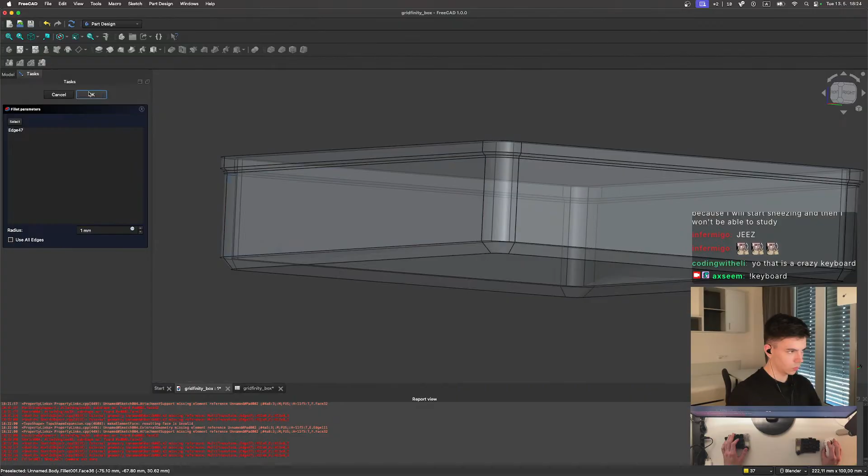Hey, hello Sakura. How's it going? Yeah, I'm good. Pretty good. Designing a box for my stuff. You too, it's nice. What do you think? Does it look good?

I'm making it full parametric, so you can just basically change everything you want. Like for instance, rib offset 4.8. Now all the ribs are huge. It's for organizing, like I'm making something like that, if not to say fully like that.

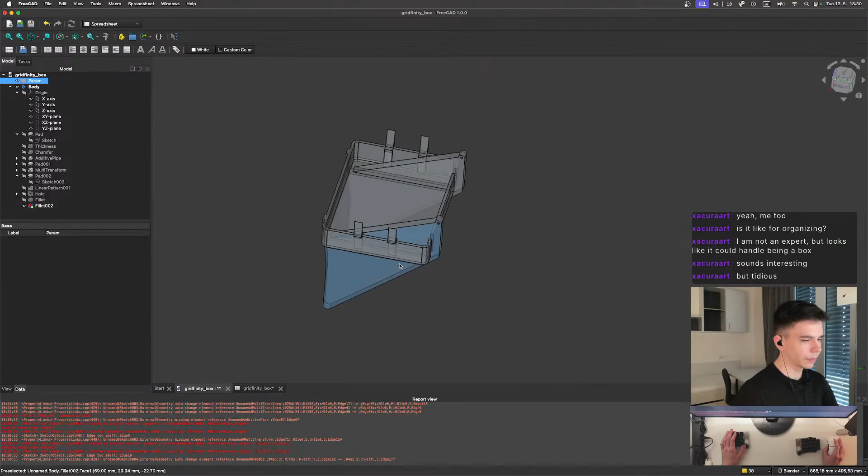Sounds interesting but tedious. Yes, this will be tedious. I don't know, I love FreeCAD, but sometimes it just doesn't make sense at all. You see, okay, quick explanation. The system has height units, where each unit is 7 millimeters, right? So you stack those plates in units. I did it the same way, so I have height unit equals 4, which is weird. Why is it 4? It should be 7, right? So height unit is 7, and when I change levels, for instance, to 4, nice.

But okay, I broke everything. Insane. That's insane. Why is it? This shows how you don't understand FreeCAD. Yep. I mean, it's not like I don't understand, it's like I have no other choice. It's like this cage. How can I say it?

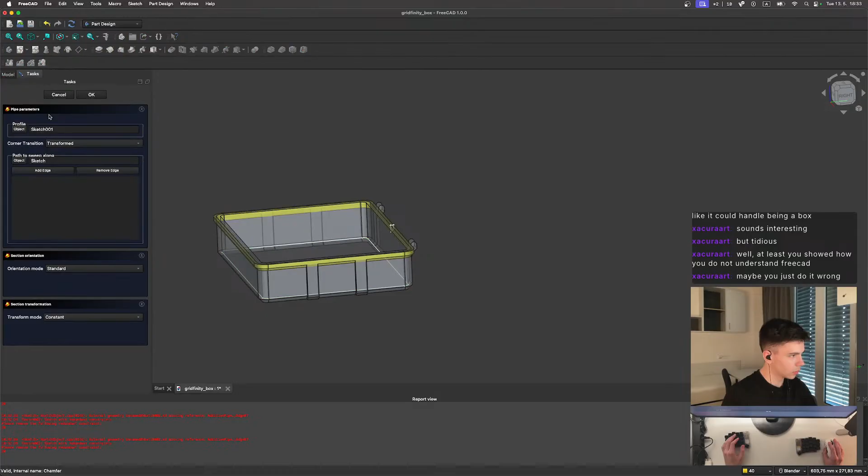What the hell is that? It just modified my sketches. Can I, will it save it? Don't save. File, open. I need a backup. Yep, here we go. Nice, nice, nice. So, not this one. What am I doing? Maybe I just do it wrong. Perhaps there is a correct way. It could be the problem, right? That I'm doing it wrong. But if there is no intuitive way to do it right, it's probably not my fault, right? That's what I'm leading to.

You see, I have this line, right? And it's constrained, so it means it has no other way it can be. So it's the only single way it can be in this sketch. I can move it. If I delete this constraint, I can change it, I can change its length. But now when it's constrained, I can't. However, if I change parameters, what can happen if I make it... if I change height too much, then it will just invert. So it basically will have the same length, but another way. And that's why it breaks, and there's nothing I can do about it. Really, what can I do?

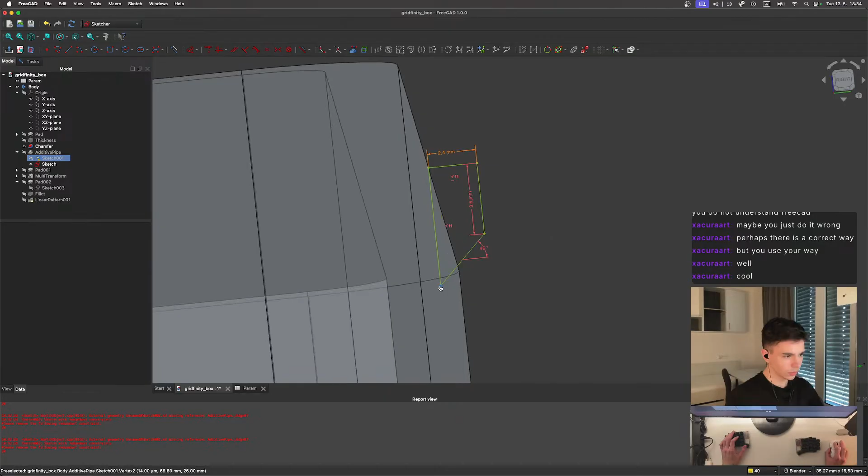I know, it's so weird. Okay.

Ask Google. I tried, bro. I tried and I got nothing.

Okay, let's try. First of all, height unit is 7, right? Okay, it works, it works. And now I'm going like 4. Okay, so here we go again, right? The moment it breaks...

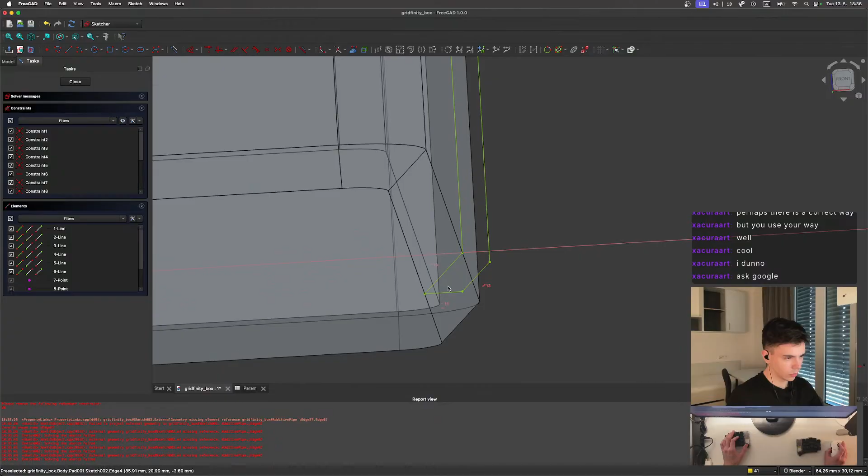Maybe that will fix it. But I'm not sure.

Okay, so now it works. Okay, now it breaks. However, if I'm doing it step by step, like 7, it still works. 6, 5, 4. You see, like, now it works for some reason.

It's so weird. Why when I say that straight to 4, it doesn't work? But if I gradually do it one by one, decreasing by 1 level each time, it works. Yeah, it's so weird. Why would it be that way? That's the problem I'm talking about.

I broke it? Why does it... Yeah, that's insane.

6? No, it breaks, I have to do it that way. Four, let's go, stop breaking stuff. I'm trying, I'm honestly trying. I wish I could, I was so good at this.

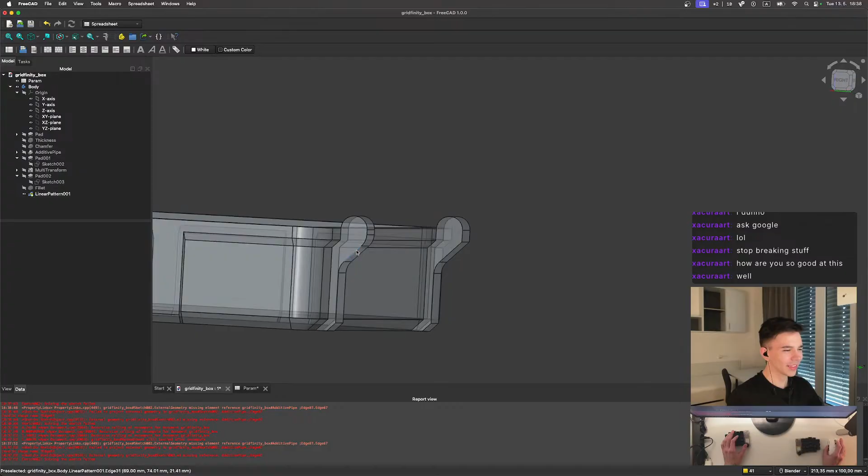8, let's go. Okay. Well... Well, what? What are you trying to say?

Okay, let's be clear. Are there any evidence that it's me who does things wrong? Because I show you a clear example where it works absolutely not how it should.

Okay. Nice, looks good to me. But we all know, yeah. Maybe it breaks because you made it wrong.

But okay, like, I'm doing the same scene in two different ways, right? I see no other explanation why it could be that way other than this software is broken. It should not be... I just have no words.

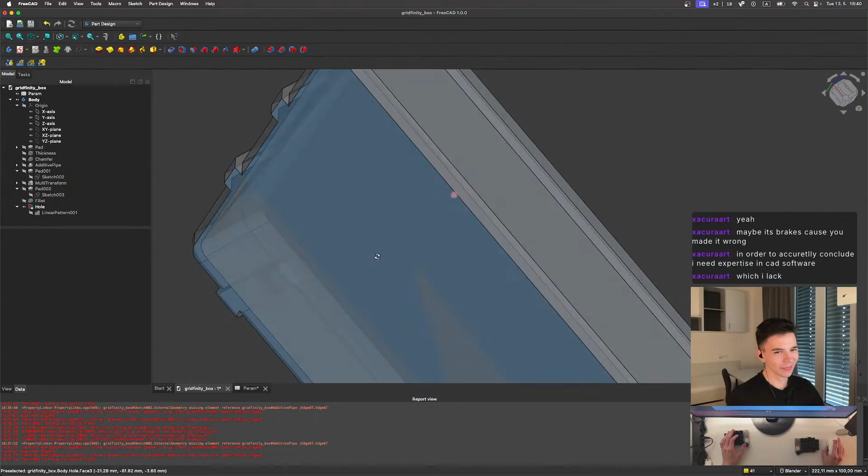In order to accurately conclude, I need expertise in CAD software, which I lack. Okay, what should I do? Also I need to...

You are studying mechanical engineering, right, Sakura? I need your help. I need... How can I call them?

I have to model those connectors and I just have no idea how do they work. As far as I understand...

But we don't have 3D modeling yet. Seriously? I thought it's like something you do the whole time. I thought it's the main thing about...

Okay, I see. So as far as I understand, it's just like...

Here is the pin, right? The screw. And because they're round, it just extends plastic here, right? So it just stretches it. And after that, this plastic just got inside the screw, got around it. And that tension just fixated, right?

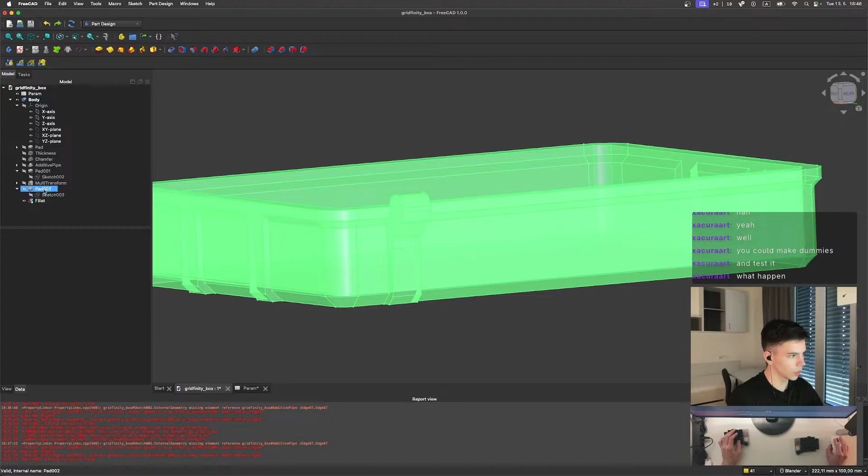What happened? Okay, so I feel like I seriously lack the technical vocabulary to explain what I'm trying to do.

But I want, like, those two ribs. What's the plan? There is gonna be a lid on top of it. And it will have two ribs outside of this one, right? And so it will be connected with a screw. It's gonna make a tension. And that way it's gonna keep them all together.

Stream died? I can tell, seems like bitrate is okay. Didn't you see that? Oh no, I got nothing. Yeah, I mean, I see stream elements shows that I rejoined the stream.

Okay, it's okay now. Yeah, okay. I guess it's internet provider probably. So, what was I talking about?

Okay, we have a lid, and this lid will have, per one rib here, there are gonna be two ribs on top, so it's gonna squish from both sides. But I want to swap them around, so there are gonna be two ribs on bottom. That way I can just mirror it here, because here it's gonna be two ribs per rib. Two. How can I say it? Two ribs per hinge, anyway, right?

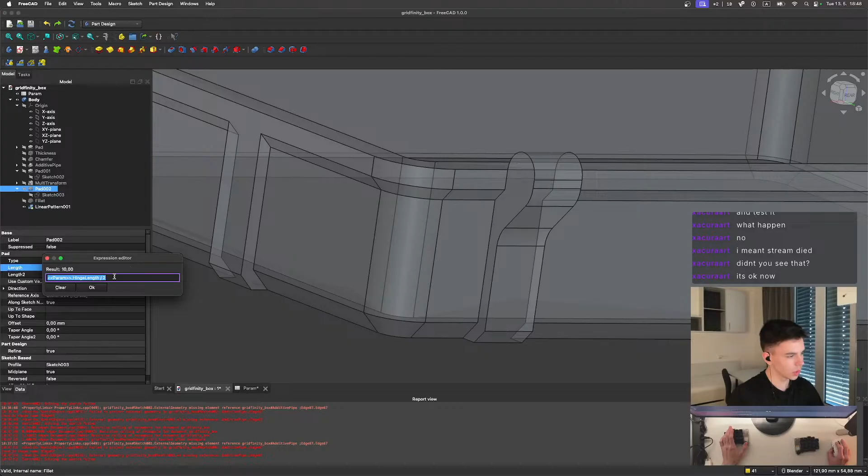Then I'm doing this one, but I'm doing offset, and I'm setting it to param hinge length divided by 2. Nice. No, it's not nice, what the hell? Oh I see, I guess it counts from this side, not from this one, right? So if I'm making it like 5, yeah.

From hinge length divided by 4 multiplied by 3. Here we go. I can tell why it didn't copy the fillet, by the way. Okay, let's redo it.

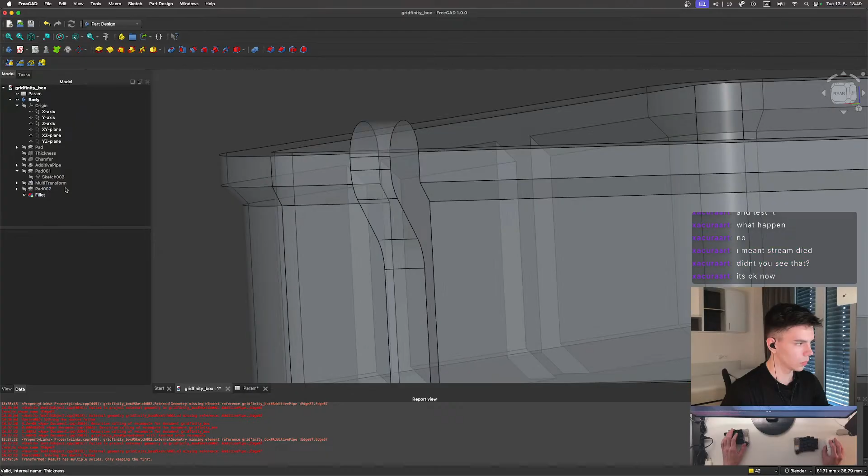Why don't I use the fillet on the copy? Fillet, nice. Yeah, here we go. Reversed.

2, and once again param hinge length divided by 4 multiplied by 3. Yep, here we go, and we are doing this once again. I broke it, I broke everything. Allow compound, just for now.

Sketch failed. Ain't no way. I broke everything once again. Okay, it works, for some reason. Reverse direction, 20. It's so weird.

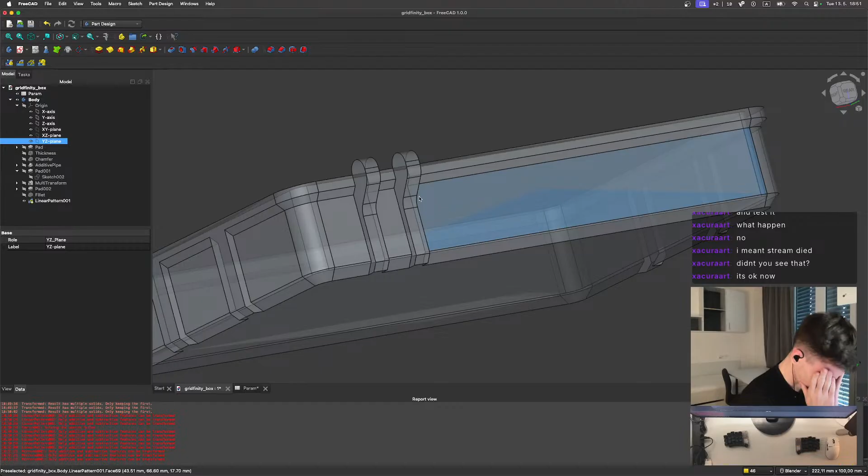I got an idea. Yeah, well, it's gonna work, right? It probably should work.

I'm making it full length. After that, I'm making a binder. Then I'm shifting that binder by not this axis, not this. Nice. I'm shifting it by hinge length divided by 4, minus.

Nice. And now I'm doing pocket. And pocket is once again hinge length divided by 2. Okay, here we go. And now I should be able to just multiply it. Nice. Nice.

But I need it to be param columns multiplied by cell width, right, minus hinge length multiplied by 2. It seems nice.

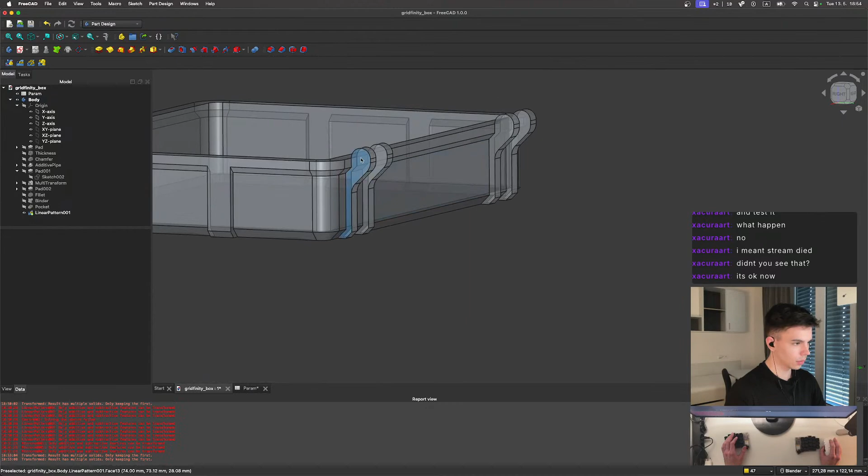Nice, making hole through all. Metric regular M3. This one. Oh no, that's not what I want.

Making dimension, I'm making it only param hinge length. Yeah, nice. Edge is close, flat. Seems good to me. The same thing here.

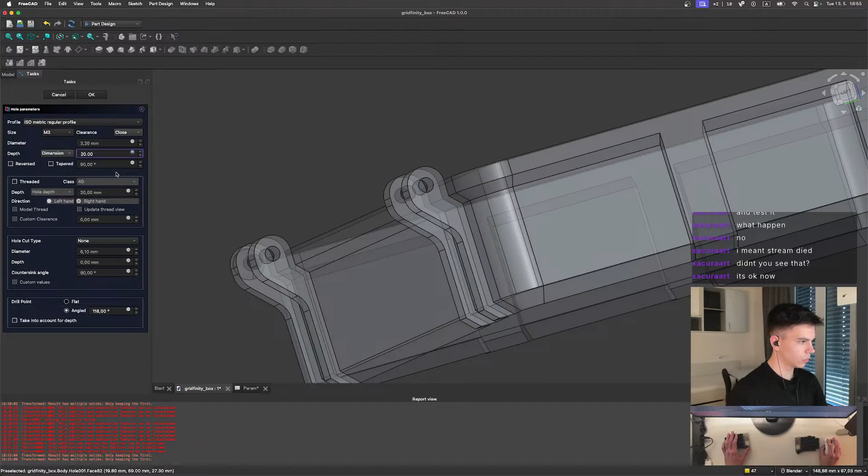Nice. And after that, I need to create holes for hex nuts. However, I have no idea what dimensions I should use. M3 hex nut dimensions.

6, right? Okay, here it's not 6. What the hell? 5.5. Interesting. 5.5, okay. Seems to be true.

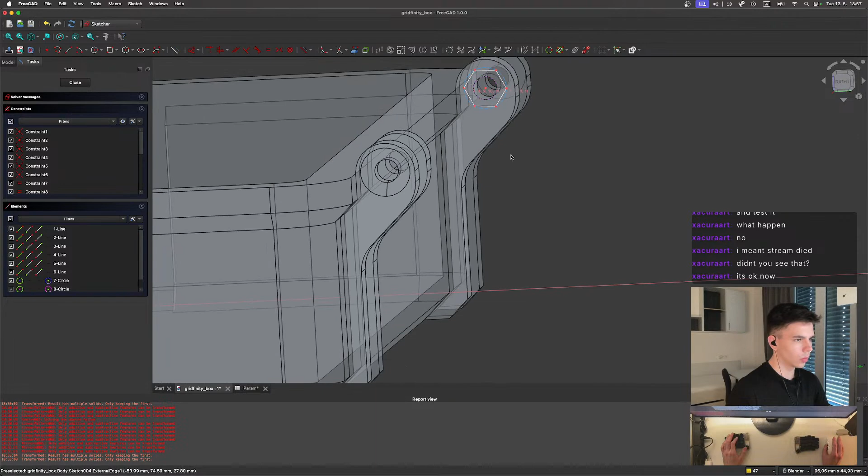So what am I doing? The... 5.6, and horizontal. Probably I should make it 5.7.

Why do you need nuts? Okay, so, like, the other choice is to make hole a bit narrow, right?

So I'll cut threads during screwing the screw, right? But that way it's not gonna be repairable. Like, after some time it's gonna wear off and screw just not gonna stay in place.

But using a nut I can just make a pocket, right? I don't know the depth. Okay, it was a nut, 2.4.

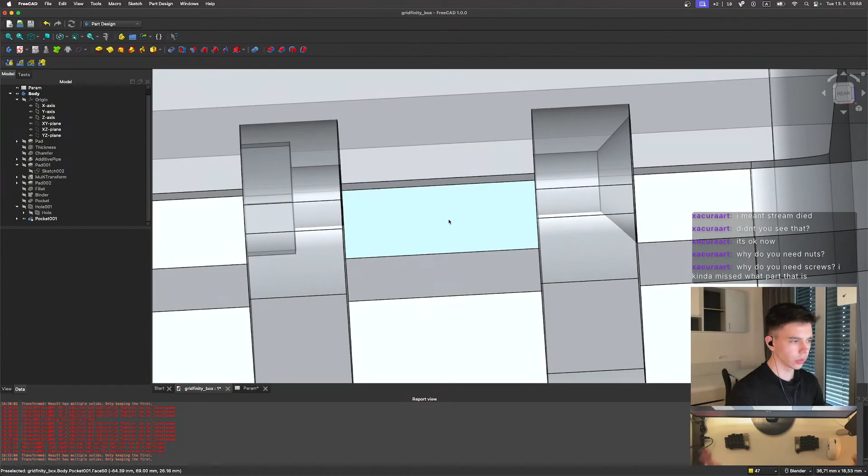So I can just make it that way. And it's gonna squish it. Why do you need screws? I kinda missed what part that is. That hinges, these are hinges.

So it's easier to just show you, like this part, no? So I just push the screw through it, screw it in, and after that it's gonna fold fully.

Why can't you make it full plastic? I tried, like I thought about it. There is just no reliable way to do it. Like it will sit on a shelf, right? Yeah, like not always. But usually, yeah.

I mean, hardware is just much more reliable. What are my other choices? Printed screws are just not gonna work because they're too fine to print on my printer, right? Plus plastic is just too soft for screws, these size screws. Other choice is to...

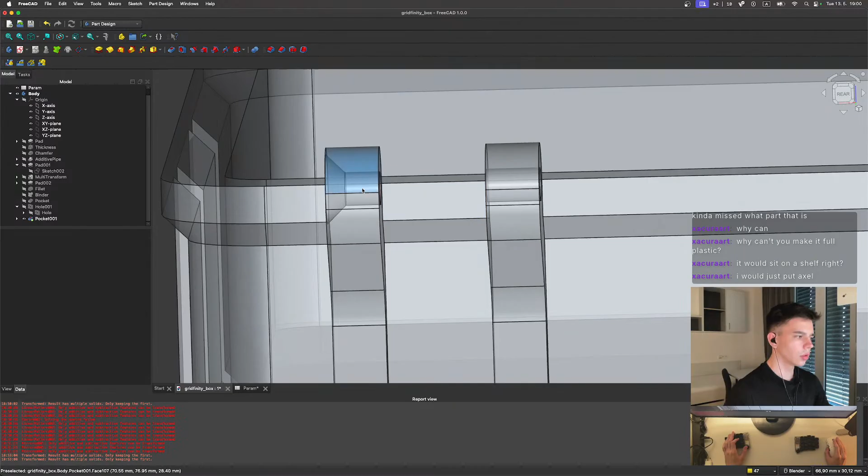Make it so I need to bend. How can I explain it? Like, I'll need to bend those parts apart, press hinge in, and then it's gonna squish it. But it's just... also if I, with enough force, it can just leave this position, you know, it can just fall off.

I would just put an axle. I have no idea what is it. Axle. Oh okay, I see.

Cut. Am I missing something? Axle. Yeah, but okay, but how is it related? How is it related to the box? I can see it.

Like, you want me to make it continuous, full length? I mean, just a stick. Yeah, but how is it gonna stay in place? You know, I need a way. Like, a screw is basically just a stick in this way, in this design, right?

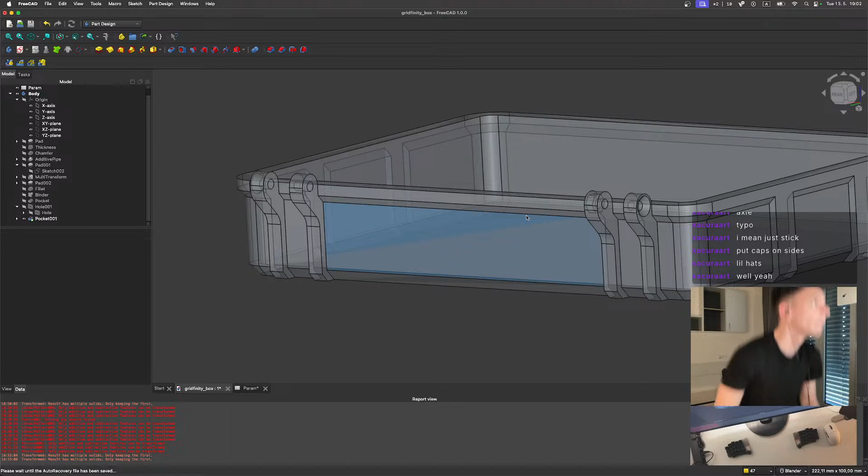I hope I'll find it. Yeah, here we go.

What do you mean by put it aside? Like, if I print sticks with heads on both sides, how am I gonna put it on this axis? It should be inside, enclosed by these hinges. Put it, and then add heads on the side. If you print heads on the stick, it's not gonna work, but if you put heads after that, yeah, it works.

So okay, you can see it's gonna be easy if I make it this way. Oh, I broke it.

Right? So it's like a spinner. And as you can see, I already lost one side because everything is fixated by friction. And that's the main problem, it's so easy to break it.

It's really unreliable, and it's hard to make it reliable, because the tolerance here is absolutely fine, it's not a problem of tolerance. I'll just try not to break it — oh, it's already broken. It's not broken, I just basically disassembled it.

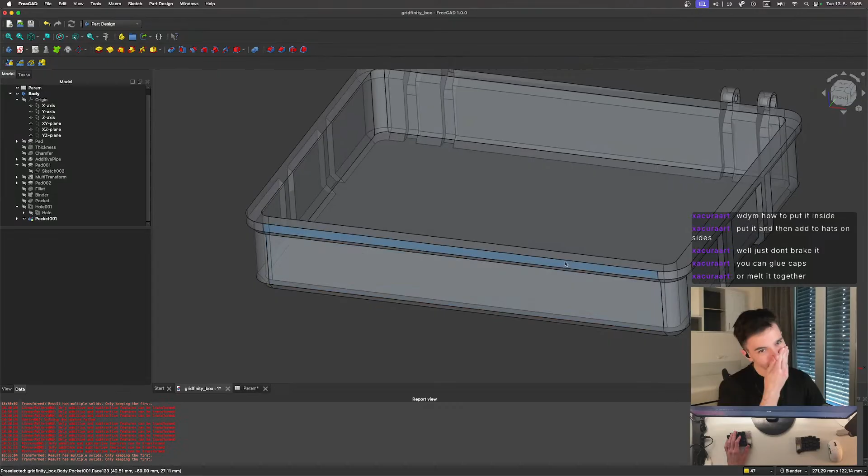You can glue caps. Oh yeah, that's something I really want to do, but I also don't have glue, or melt it together. I want to make 4 or 5 of those boxes, and that's not what I want to do. I mean, I'm okay with doing it 4 or 5 times,

but with all my experience in keyboards, I just came to the conclusion that it's much better to make it with the least steps possible. Buy it? I can't, there is no such boxes, no modular one.

Like this one. And the ones that are regular boxes, not modular, they cost the same as the plastic to print one, if not more. So I even save money on that.

Not boxes — you said you don't have glue, buy it. Ah, okay, I see. It just feels bad, like why would I glue it if I can make it that way, right?

It's gonna be much more reliable and more repairable, and it's not like screws cost a lot, you know. So if I'm already gonna buy glue, why can't I just buy screws, right? What's the problem? What's the point of not buying screws just to buy glue?

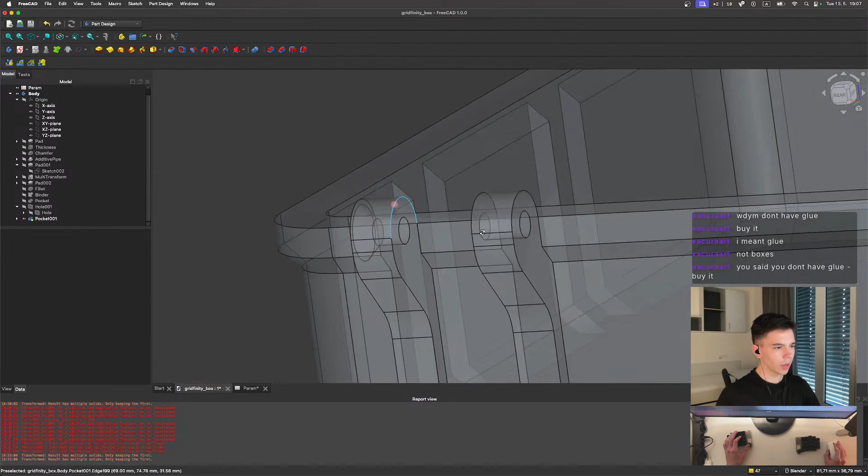If there was a solution without screws, okay, but the ones you propose are just more complicated than this one. That's the problem. The best I can think of is just to push it inside, so those holes are not gonna be through all the way, right? They're gonna be just to half.

From the left part to the half of the hinge, and the same way here, and I'm just gonna squish it inside. But it's also gonna be unreliable — if something happens to the hinge, I'll have to reprint everything.

Okay. Export. Step. Gridfinity box, both. Save.

What do you mean reprint everything? That's the point — no, if the hinge breaks, right? If it breaks, it's plastic. No, like...

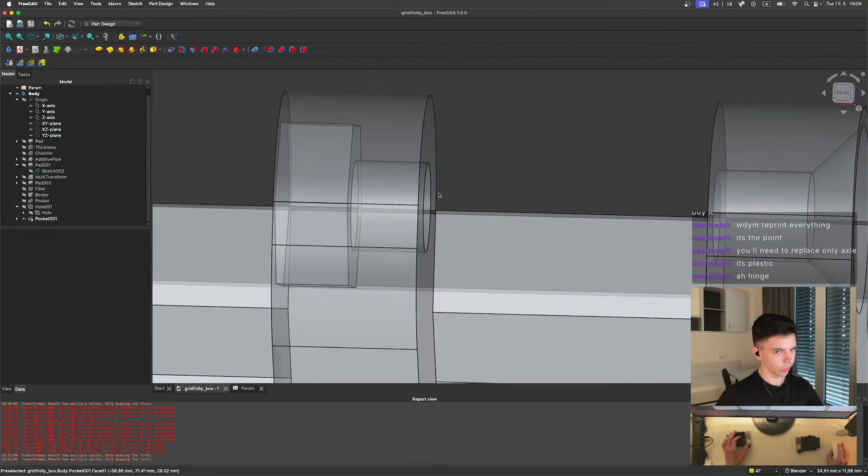If I'm using screws, there's little chance, it's unlikely you'll break the hinges. If I'm gonna squish it in, if I change the design to squish it in, the chance is gonna grow rapidly. And if I need to swap them, swap lids for instance, and I break it, there's no other option but to reprint it. I just try to balance simplicity, rigidity, and repairability. That's it. Screws seem like the most balanced solution.

Not this one. Gridfinity box, let's go.

To print this one, it takes 6 hours. Know what I'm saying? It's gonna take more. Oh, my bad, the layers are too fine. Okay, let me read.

So the first one, butt hinge - it's like the one I'm doing. The most reliable, the most simple to do, pretty much simple, and it's easily repairable. What are my other options?

Print in place. So it prints in place and plastic makes everything for screw. The problem is I can't do that because my bottom part is much higher than the lid. So I can't just print the lid here, you know what I mean? They should be printed separately, so it's no go.

Snap hinge - that's the one I was talking about. Used in injection molding, and the principles translate surprisingly well. So you basically just snap them in 2 parts and then assemble afterwards, relying on the ability of the plastic to flex and snap into place by precisely controlling offsets.

The problem is it's gonna be really difficult to do here, because my hinges are - it's better to show it here. Like, there is no space for plastic to bend. It just won't flex.

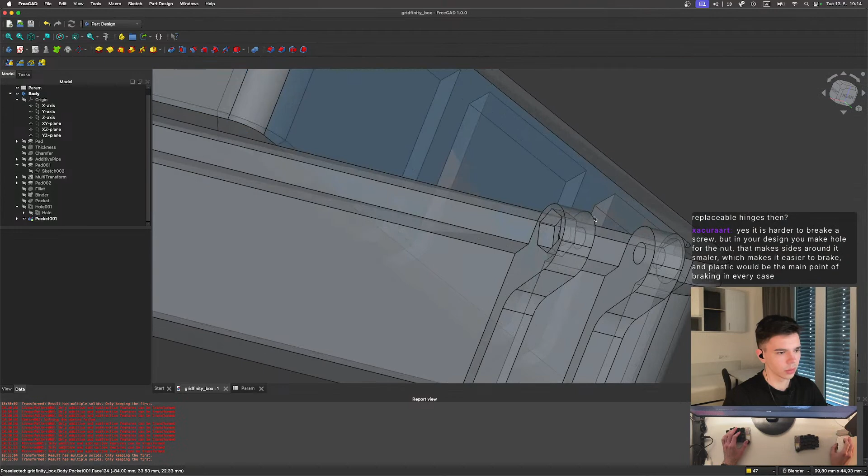Yes, it's harder to break a screw, but in your design, you make a hole for the nut that makes the sides around it smaller, which makes it easier to break, and plastic would be the main point. But there is no tension - you're right, but there are gonna be no tension on the sides. That's the point, so it's probably should not affect. I guess I can just do it this way.

There is a truth in that. I can - oops, my bad. Yeah, perhaps I can make it that way. But I don't think the main tension is gonna be on this cylinder, on these two.

I still don't see how a plastic axle would introduce tension that could break it. Like, imagine it is open, right? I can be wrong, but how do I see it?

Imagine the lid is open, right? So the lid is here, and it's connected here, and there is a long plastic pin here - the axle, right? And what if I'm gonna bend this lid in this direction? It's gonna just spin. It's not gonna break it, right?

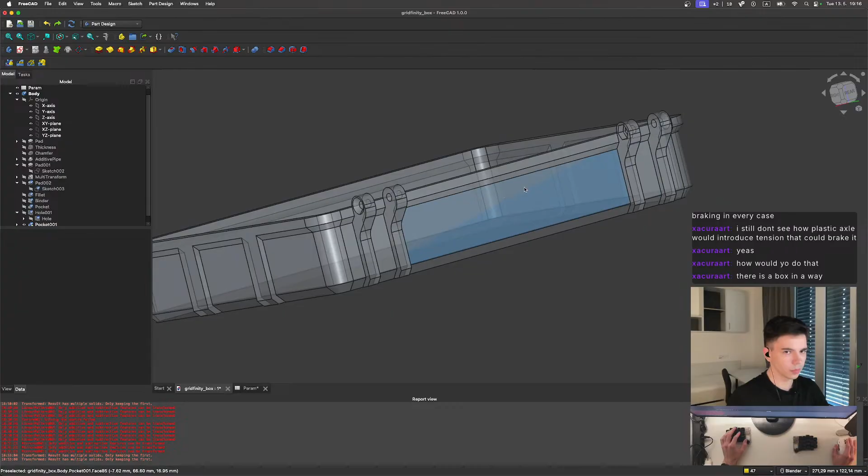Yeah, it probably should not be that bad. There's also twisting force - where? You mean... Okay, I see, you think it's not gonna be that bad, is it? Plus, it's gonna be constant static force, it's not like it's gonna change - I'll screw it once, and it's not gonna change.

You can make two small axles. Yeah, but that's not the main point. I understand that I can make two axles.

I thought about it, I had an idea of making something similar to what you propose, but like - we have an axle, right? So it's just a tube, basically, and it will have a printed head here, already printed. You want to put it on here, and here I wanted to make something like this - so I'll squish it, put it in, and it will just grab the sides.

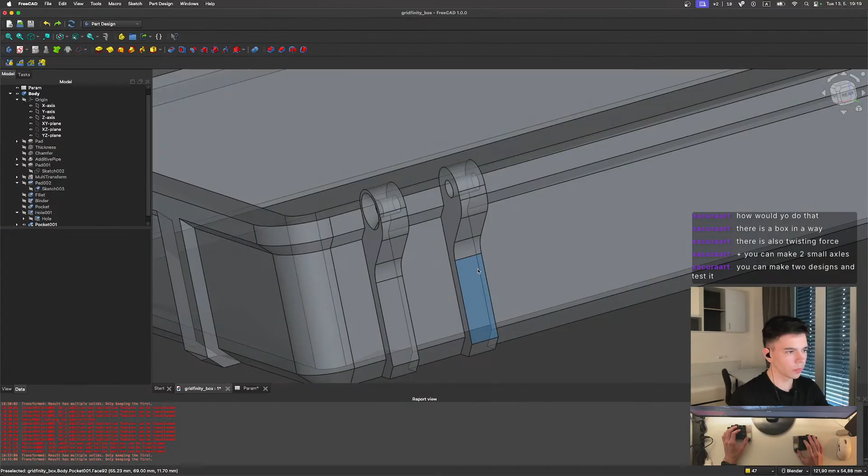What I was trying to say - oh yeah, so I'll just leave it this way, as it is. So it's designed for screws first, but there is absolutely no problem to 3D print axles and just use axles instead of screws, right? Or am I wrong? There should be absolutely no problem with that, I guess. And that way, it's gonna be like 2 in 1.

It should be. Okay, now I'm curious. It's like half a millimeter, which is bad. No, it crashed. Start recovery. Okay, I thought I was about to redo everything.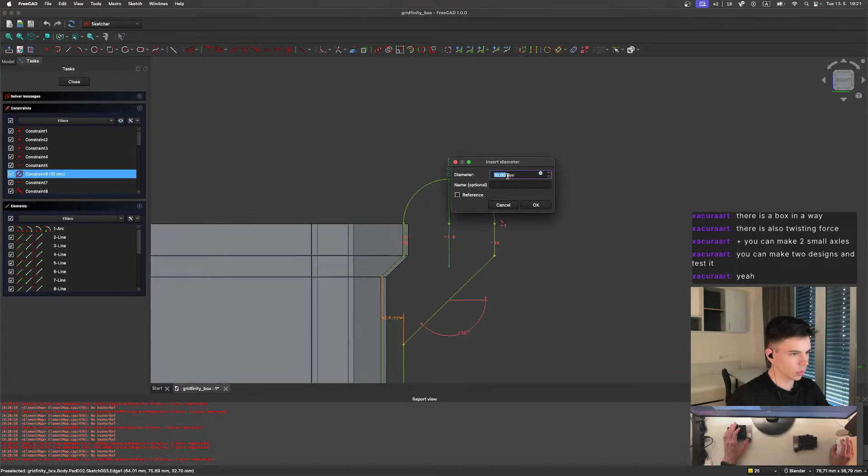Okay, yeah, I probably want to make the hinges a bit larger. It's 10 now? No, wait. Oh, it was 8. Okay, nice.

Okay, I'm curious, will it fit on my bed? If I make it like rows 4 and columns 5.

Okay, small nuts. Are there nuts smaller than that? I know there are thinner nuts. I was buying some, I have some thin nuts. But I'm not sure if there are smaller, more narrow ones. As you told me, and as I agree, it's probably the twist force which is gonna cause more problems. But I'm not sure if it's gonna be that bad, right? I guess it should be good. There's not enough plastic around it.

Yeah, I want to test if it's gonna fit on my bed. Export. Save. Okay. Orca slicer.

Twist force is really a problem, you think so? It's hard to imagine where it would be. I don't think those screws gonna make that much force to break the hinge. It's also circular, right? And because of this smooth shape, it should be even force. It should smooth the force around the surface.

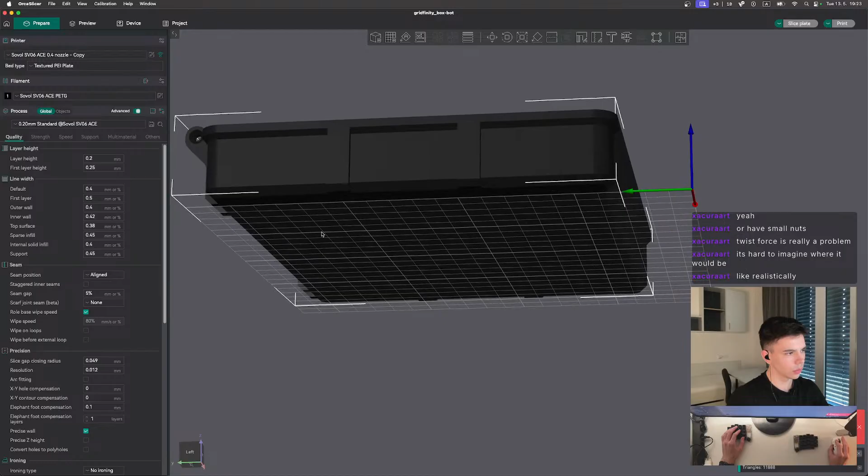It doesn't fit. I mean, it's close. I just have to make those ribs smaller by half, and it will fit. Nice.

I want to try it right now, like realistically. I guess the only real option to know that is just to test it. There are way too many variables.

By the way, now I'm curious, what are you doing in mechanical engineering if you don't use CAD? So what's the point? Or are you doing the same things you would do in CAD but in real life, physically? But don't you like designing things? I'm really curious. Okay, it works now, right? Nice.

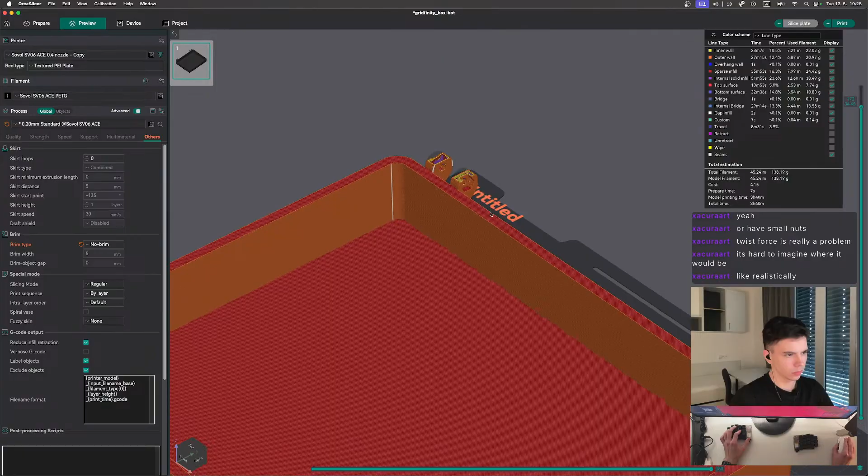It's complicated. Okay. Like... okay, so you're more into learning theoretical things, I guess. Theoretical? I'm not sure how best to say it.

Okay, 3 hours, not bad. 140 grams. But it's without the lid, so it's gonna be, I guess, 250, right? Something like that. Which is kind of a lot, but okay, whatever.

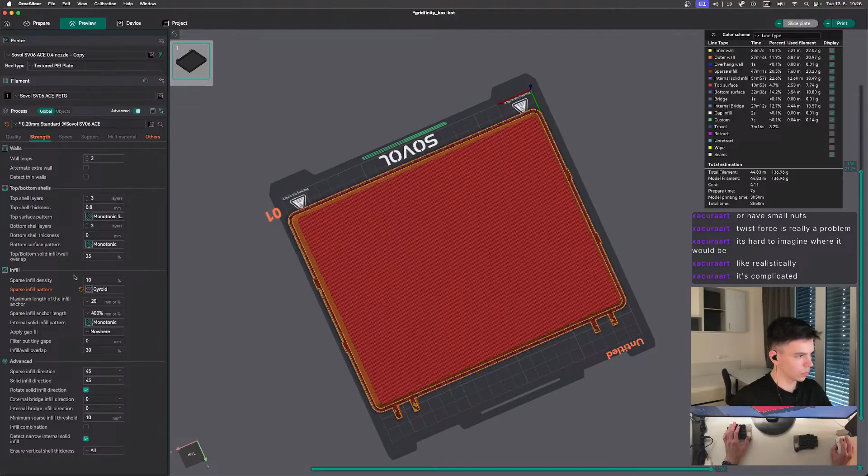Oh, I'm gonna print it as 10% infill and 2 wall loops. I just started uni this semester, but the main starting point is usually in autumn. So now I have to learn math and physics for 2 semesters in one, to catch up with others. Poor you. And CAD is for the next semester. Okay, I see.

Bro, that sounds not funny, to be honest. Absolutely not funny. Oh, that's terrible. That's so cool. It's so pretty.

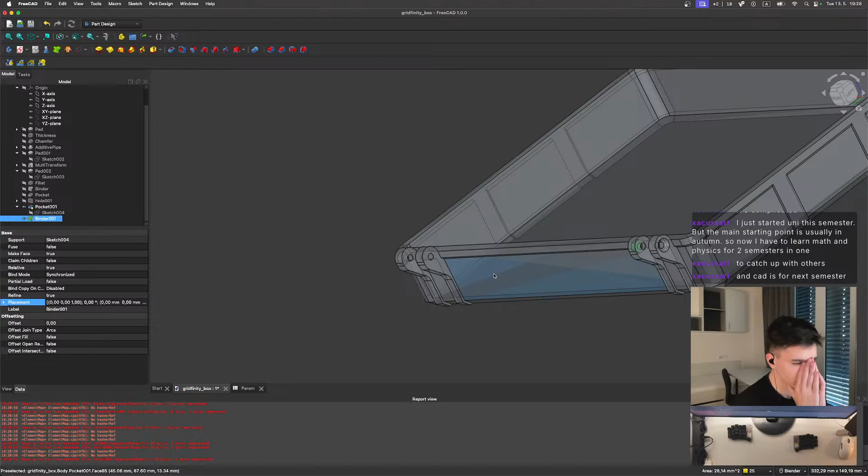Okay. I have to make one more screw here. But first of all, I want to make a binder, right? Yeah, I want to make a binder. Here we go, and I want to attach it here. Can I do that? Probably can't. No, probably can't. Oh, it's not gonna work. It's not gonna work. Yeah, it's not gonna work. Because I can't have more than 2 hinges. Hinge amount 3. Fantastic. I love FreeCAD.

Okay, so I'll just accept the fact that it's not gonna work, right? Remove the hole, remove the hole, remove the copy. I have to do it here, and only after that I have to clone it.

And 3, close. Flat. Yeah, that way. And I hope it should... wait, what's the problem?

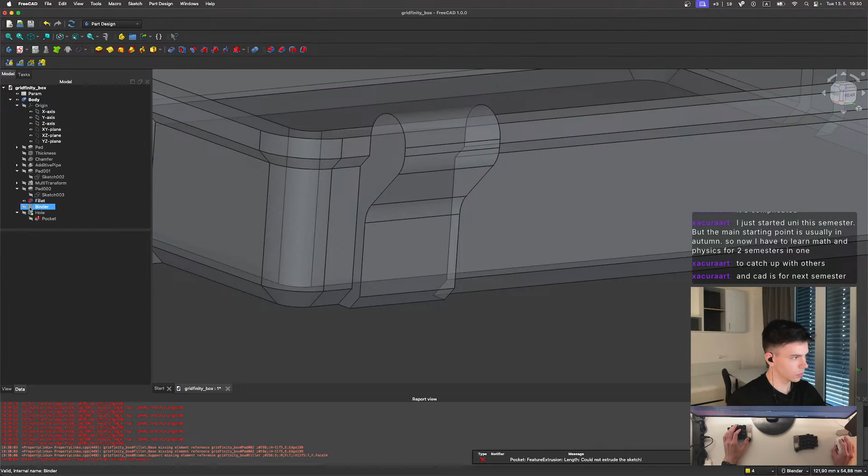That's unreal. Yes. Okay, I have this one, right? Yeah. Can I use it? I should be able to.

I delete this one, this one, this one. Then I'm just doing a pocket, but I'm doing symmetrical to plane and making it hinge length. Oops, my bad, not hinge length. Divided by 2.

Yep, here we go. Now we add fillets. 5, should be good enough. Now I made a hole. Nice. No, not nice.

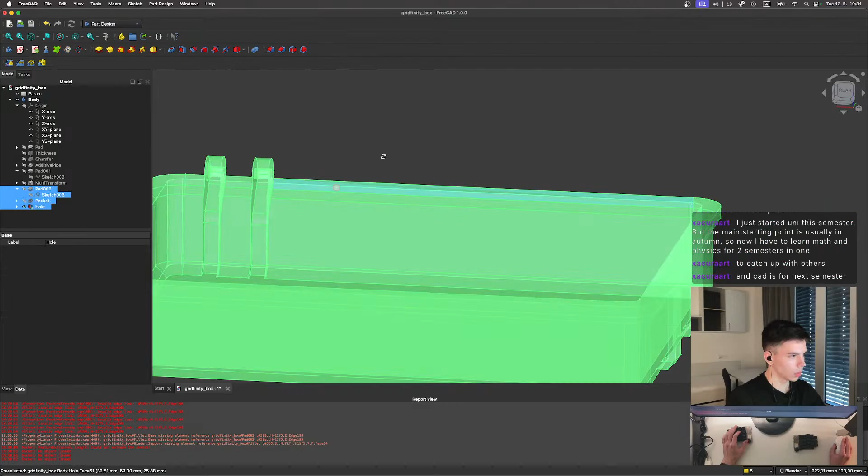Yep, here we go. And now I'm gonna copy it. Will it work? Okay, seems to work. Okay, it was right from the very beginning. There is no hole. There is no hole. Damn. Why is that?

Actually, it's already late. I guess I'll do it later. Good enough for now.